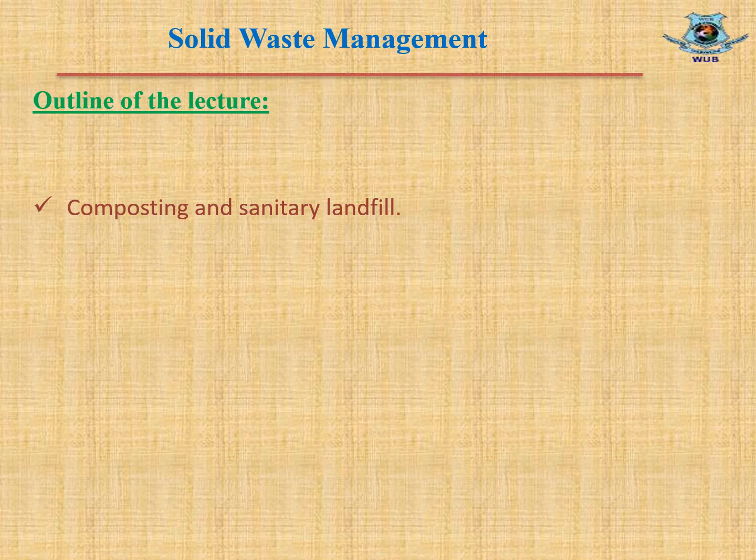Composting. Composting is possible only for organic solid waste, and to convert solid waste into compost, first we need to sort out the organic solid waste, then store it for bacterial conversion to turn into compost, which can be handled, stored and transported without any adverse environmental effect. The compost can be used as organic manure for improvement of soil quality and fertility.

Characteristics of compost. Compost is a humus-like product and it is a very good soil conditioner, which supplies nutrients to soil. The main function of compost is to make soil fertile and also increase its production. That means to produce more crops from the same soil by applying fertilizer. The application of compost to agricultural land brings significant favorable changes in soil properties. Some of the important changes are increased organic contents of soils.

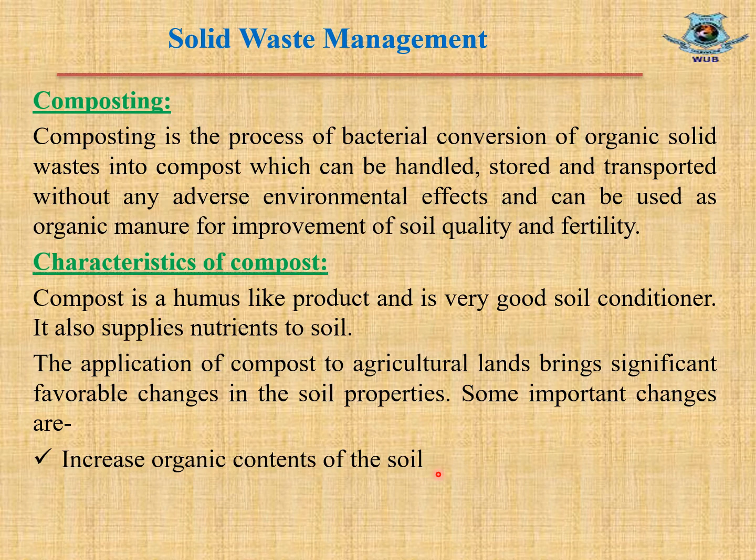As we know, compost is the organic content of solid wastes, and it can easily increase the organic content of soil, which makes the soil more fertile. Compost can also increase the moisture retention capacity of soil. It also improves aeration at the root zone, which helps to supply more oxygen into the root zone of the crops and to increase the production of the crops. It also improves soil texture, soil fertility, and also replenishes micronutrients in soil.

Factors affecting composting. Composting is basically a biological process and depends on several factors. Some of these factors are mentioned below. First, the waste material subject to composting must be biodegradable. As biodegradable material can be converted into organic matter, which increases soil fertility, only biodegradable material should be used to convert into compost. For example, food waste is biodegradable and can be used in composting, but wood is not biodegradable, so we will not use wood for compost.

Suitable numbers and types of microorganisms must be present. As the number of microorganisms increases, it increases the organic conversion of solid waste and also replenishes the lack of minerals present in soils. The rate and efficiency of composting are dependent on the activity of microorganisms. As stated earlier, if the number of microorganisms is higher, the solid waste will convert into compost material earlier, and it will increase the fertility of soils because more microorganisms can replenish the lack of soils quickly.

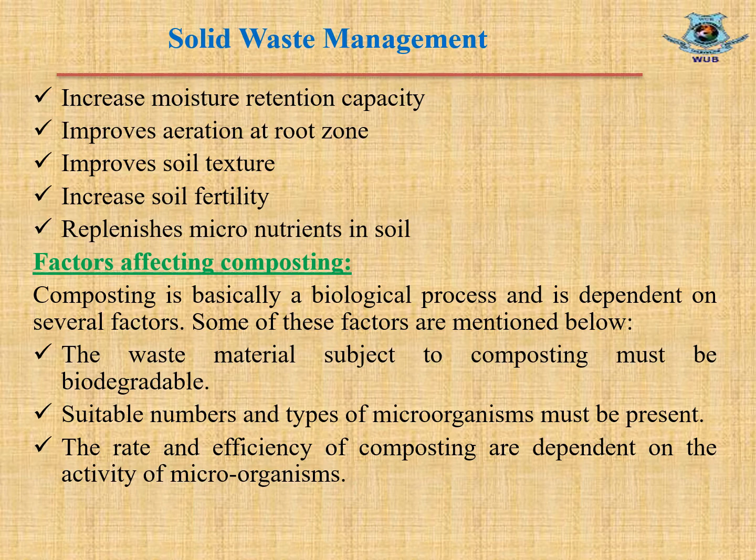Similarly, environmental factors like pH, temperature, and presence of oxygen control the processes. That means these three items control the process of composting. As we know, temperature increases the rate of conversion of solid waste into compost. So with increasing temperature, the rate of conversion will increase and vice versa. Similarly, we know oxygen increases the rate of bacterial conversion. So the presence of oxygen also increases the bacterial conversion and the production of compost.

And the compost must have a controlled pH value so that after application of the compost into soil, it does not make the soil acidic or alkaline, which will decrease the production of the soil. Then the waste must be nutritionally balanced. If some minerals are lacking in the compost, then it cannot replenish the lack of minerals of the soil and cannot act as a good compost.

Then the presence of toxic substances has adverse effects on the process. That means if the solid waste has toxic substances, it will have adverse effects on the process. That means the compost will not be good for the soil and will decrease the production.

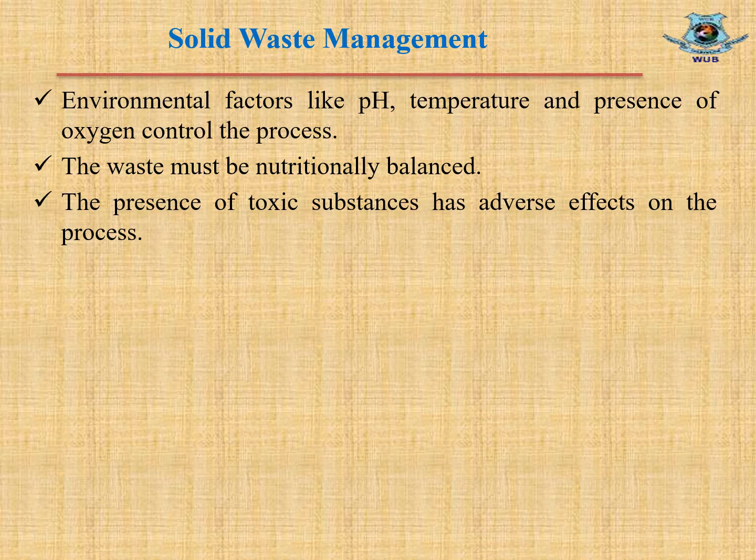And this is the flow diagram of the basic composting process. First, we need to collect organic solid waste for converting it into compost. Then these salvageable materials are sent for screening or sorting purposes.

During screening, non-compostable materials, such as the materials which are not biodegradable, are removed from the materials, and the rest of the materials, that means the organic materials, are shredded or pulverized. After shredding or pulverizing, water is added to the shredded solid waste to adjust the moisture content, and it is kept for aerobic composting with the help of air.

During aerobic composting, excess carbon dioxide, air and ammonia are removed from the solid waste. Then after the completion of aerobic composting, when the waste is maturing, it is processed or bagged for sellable compost. That means after the composting process, the solid waste is ready for packaging and it is then sold to the consumers for application on land.

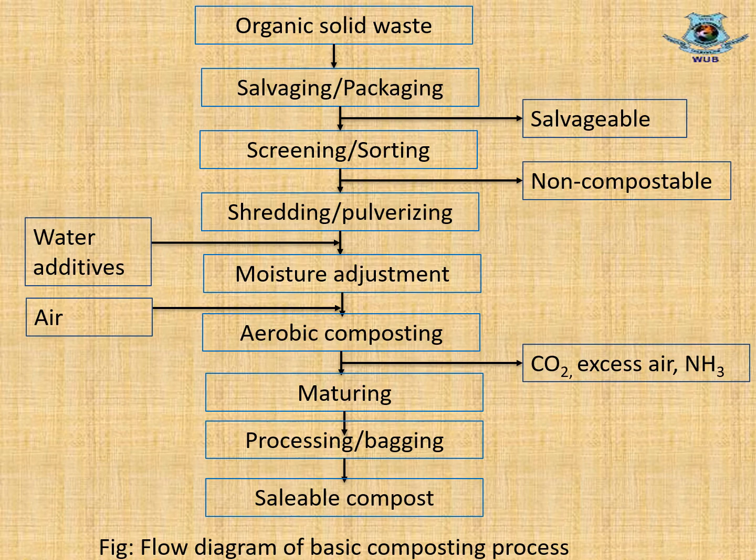Composting in Bangladesh. In Bangladesh, composting has not been considered on a large scale, and small scale production is continuing in some parts of the country. In Rajshahi, human waste is mixed with garbage and is processed to convert it into compost. Recently, a small NGO named Waste Concern has established it at Mirpur in Dhaka, where solid waste is collected from selected households and aerobically converted into compost.

The major considerations for composting of solid wastes in Bangladesh are availability and suitability of wastes. Earlier we said that compost should have sufficient microorganisms, and to convert solid waste into compost, such types of solid waste have to be available.

Socio-economic conditions. If the economy of the society is well developed, people will not generally use these types of solid waste or use this type of compost on their land. The third one is technological access. If technology is not available to produce this type of compost, it will not be possible to convert the solid waste into compost.

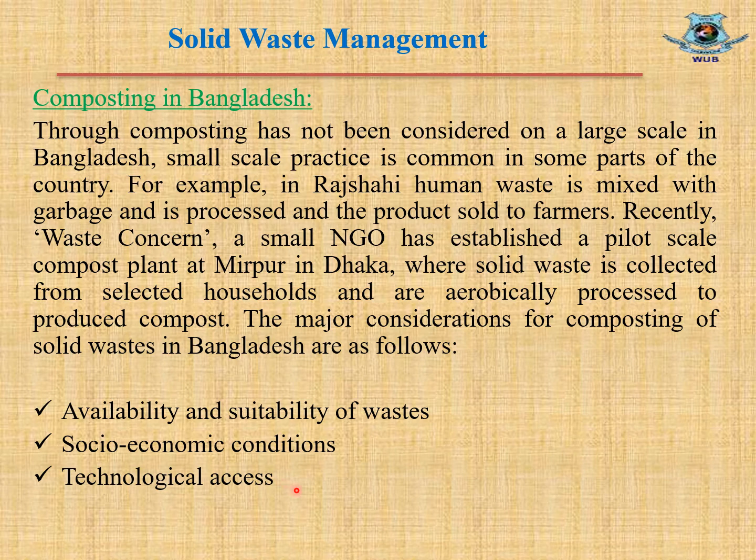Marketing of compost. The converted compost should have a sufficient marketplace to sell. Affordable prices for farmers. If the price of the compost is higher, farmers will be discouraged to use that compost on their land. Environmental legislation and enforcement. Finally, present disposal cost. If the cost of present disposal is lower than the cost to convert the solid waste into compost, people will be discouraged to convert their solid waste into compost.

Then sanitary landfill. Sanitary landfill means the filling of land with solid waste materials. Sanitary landfill may be defined as the operation in which wastes to be disposed of are compacted in layers and covered with a layer of earth at the end of each day's operation. When the landfill site has reached its ultimate capacity, a thick final layer of cover material needs to be applied over it.

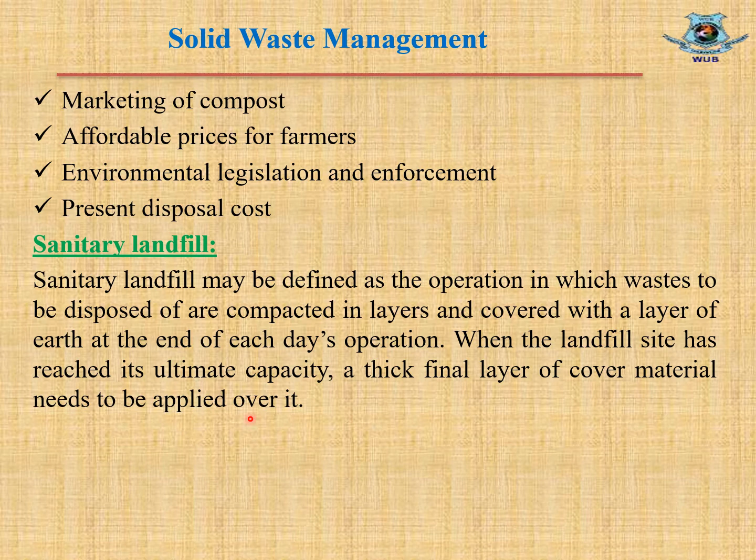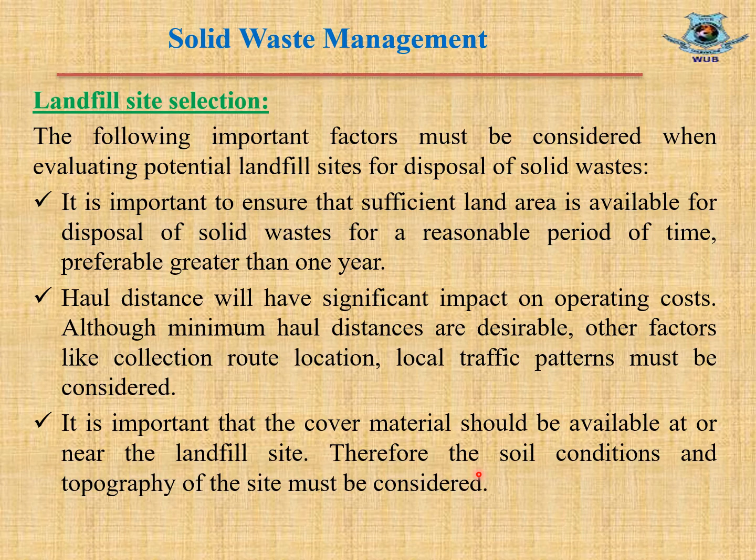It is important that the cover material should be available at or near the landfill site. Therefore, the soil conditions and topography of the site must be considered. Climatic conditions, for example wind patterns and local surface water hydrology, should be considered so that the landfill site can be accessed all around the year.

Extreme care should be taken in the operation of the landfill so that it is environmentally acceptable with respect to noise, odor, dust and vector control. That means it should not spread noise or odor, and should not spread any microorganisms that are responsible for vector-borne disease. Especially flying papers and plastics must also be controlled, which are very objectionable to the locality.